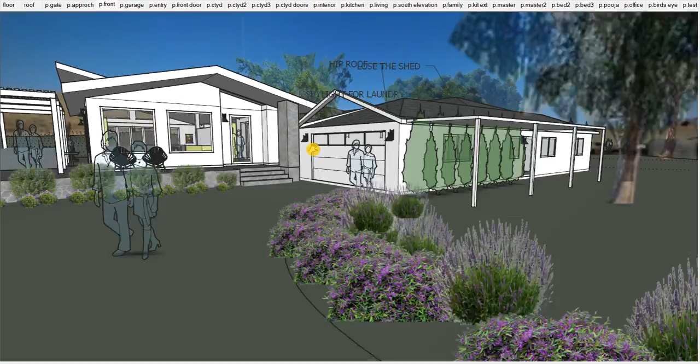When we met last, you said that you were pretty happy with the overall shape and look of the home, but we came up with a couple really good changes on the fly, such as taking the gable roof over the garage and making it a hip roof.

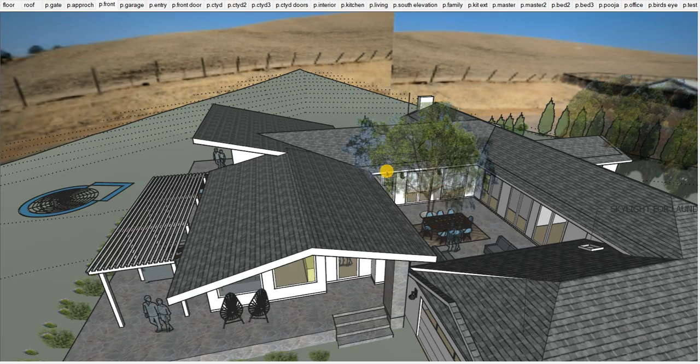But there were a couple comments you made that might have been on the fly, but they really stuck with me—about the boxiness of the master suite, which we'll get to in a bit, and also that the entry here in the corner wasn't quite suiting you. You wanted a little more height, and you wanted it to be a bit more centered on the elevation at the front. So I explored whether I could just continue the roof slope up this way to get some more added height in the foyer.

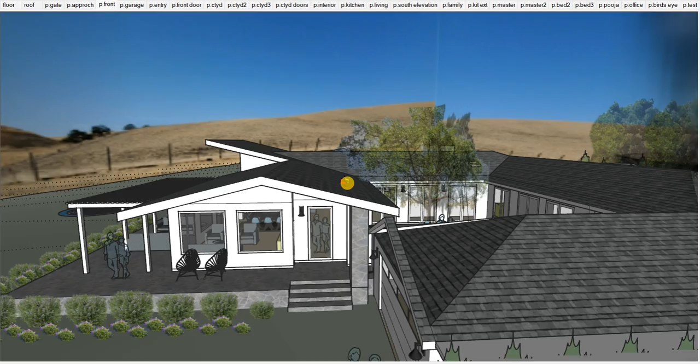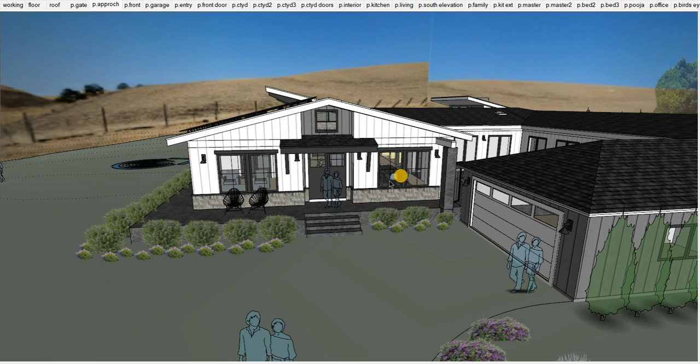I wasn't satisfied with anything I was coming up with, so I took a look at reconfiguring the floor plan at the front area to allow the elevation to be centered, naturally taller, but still have a really good layout where the foyer now comes in between and enters the home, centered between the living area and the dining room. So I've reconfigured the floor plan here, and I think I'm quite happy with the look.

So the entry is right here, centered in the elevation. We have a tall window at the top of the full-height entry. I've introduced a little low roof element here just to break the scale of this elevation down and make it a little more interesting.

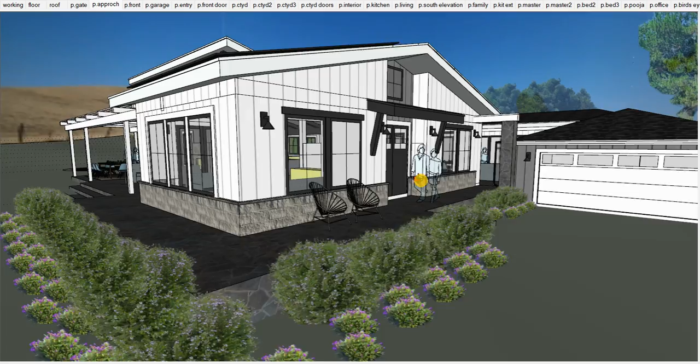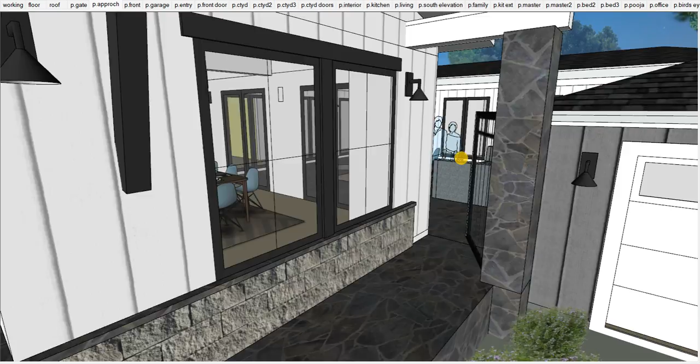I've downplayed this stone portal leading to the courtyard a bit now that the front elevation is centered here and the front entry was so domineering. I kind of want to downplay this—I still think it's nice to have this element with a 6'8" tall gate leading into the courtyard. I like that a lot, but downplayed from what we had.

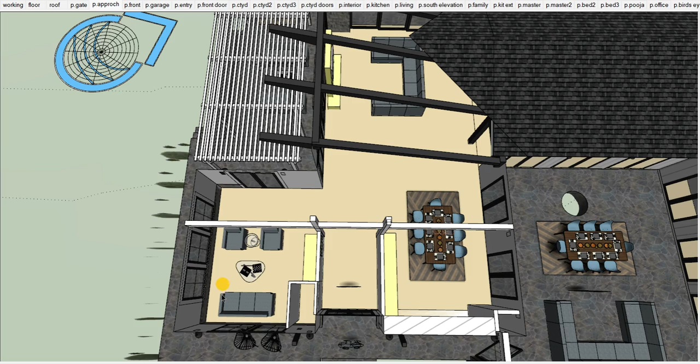If we take a real quick, very rough look at the floor plan, you'd come into the foyer. I propose a little coat closet right here off the entry, then past these two posts into sort of the circulation zone that leads you into the living room area, with a lot of windows engaging out into the backyard and side yard space, plus a sliding glass door leading into a very large, expansive covered pergola area.

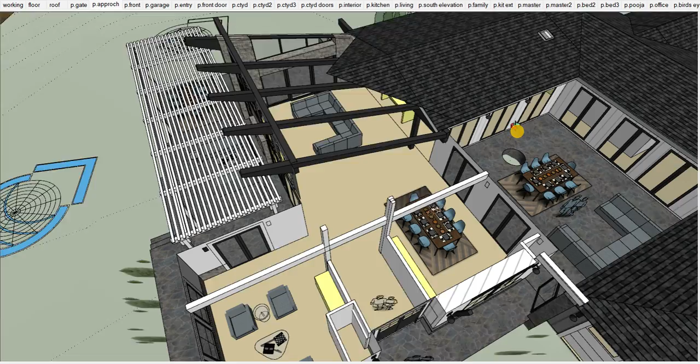The dining room, instead of occupying this space here, I shifted down towards the front part of the house and more of the courtyard area. But it still has a good connection to the kitchen, the family room, and now a bit of the living room as well, and the courtyard. This reconfiguration of the floor plan is what's allowing for an elevation that I think might get you just a little more excited about the front.

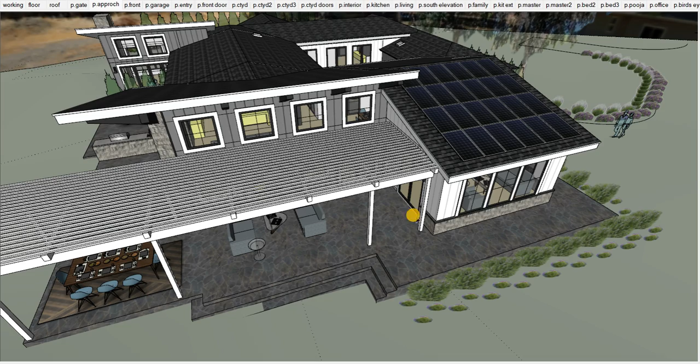Touring around the rest of the home, I know you guys were really into the pergola idea out here, but because of the shift in the floor plan configuration, I now think it'd be a good idea to bring this pergola element up against the tall southern-facing wall. This is going to provide a lot of great shade for these windows that would otherwise get really impacted by the southern sun.

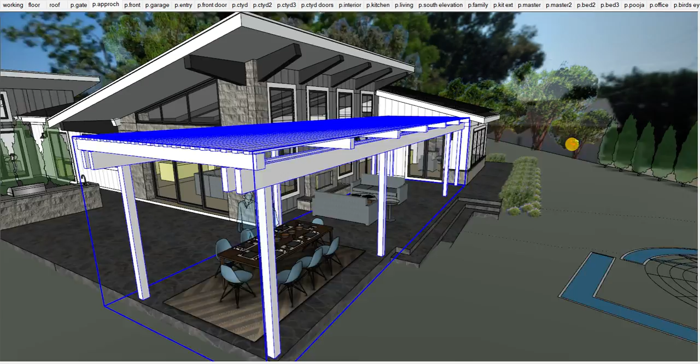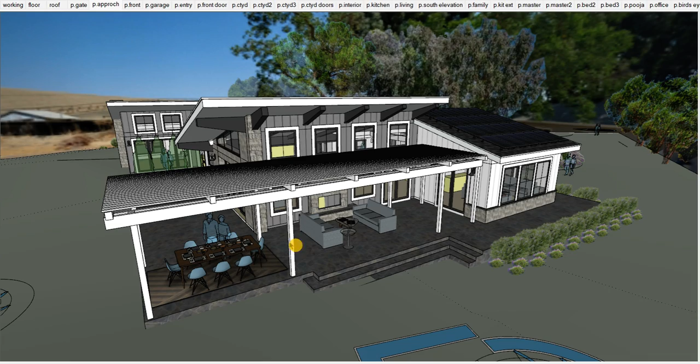This overhang up here, a really impressive roof overhang, is going to protect these clerestory windows just fine. But this pergola element down here provides a lot of really great shade and creates a little outdoor space for you. Without it, the home is still quite fantastic, but with that piece, it helps bring people out into this southern elevation party space.

Very excited about this. So a change we talked about here that I've now explored further was—hey, what could we do to make this back wall a lot classier?

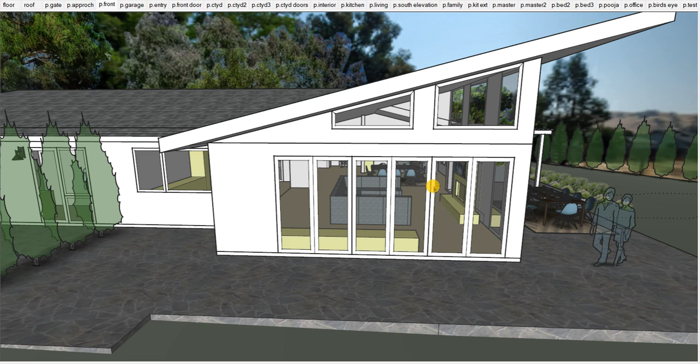What I had quickly mocked up for you when we met last time was something where we'd do one of those bifolding accordion doors, where each panel is about 32 inches wide, just under 3 feet, and they can all accordion fold and live in a stack on the side. That's one way of doing it.

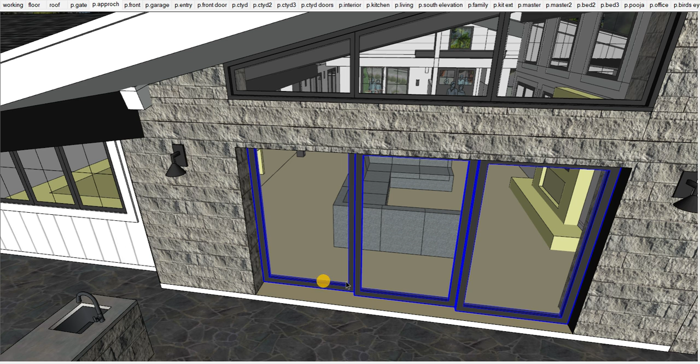But I really like seeing fewer panels, fewer frames, more glass to frame ratio, with a sliding pocket door. So what I'd propose is that all three panels, each 5 feet wide for a 15 foot wide opening, would slide away into a pocket that's also 5 feet wide, so they really just disappear from view and give you this great outdoor connection, unhindered and uninterrupted.

Perhaps we want to go with an L-shaped furniture arrangement rather than anything with a back right up against all this glass, but that's interior design for another day.

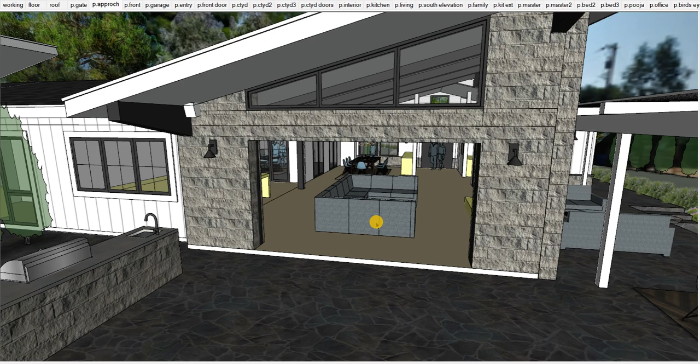But I really, really like this. With a special treatment here where we have this expensive door down below, I'd say let's go for these expensive rake top windows, these angle top windows that just go right up to the ceiling plane.

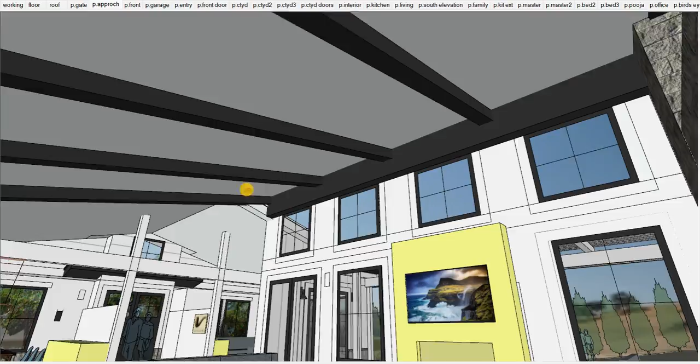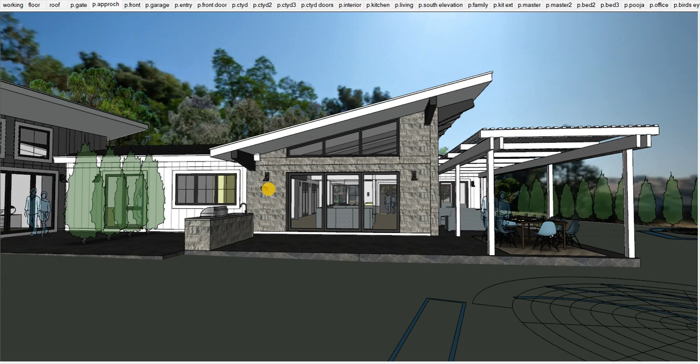And then inside, to provide a little interest and rhythm to the ceiling plane - this is so rough right now, I'm hesitant to really show this to you - but I propose we'd see a continuation of these exposed roof beams on the inside to provide visual interest and hopefully get a bit of a twofer, a little more bang for the buck out of the structural frame. This is something I'd want to explore more if you're intrigued, study it and iterate on it. Right now this is just a first pass.

I've incorporated a little outdoor kitchen here, off of the main indoor kitchen. My one concern is, first of all, I don't know if you do a lot of outdoor cooking, if this is something you'd even really want.

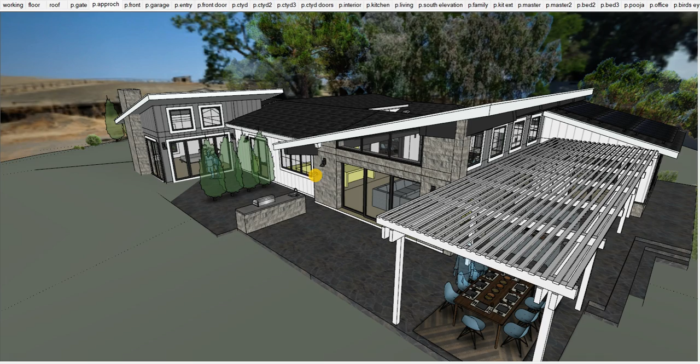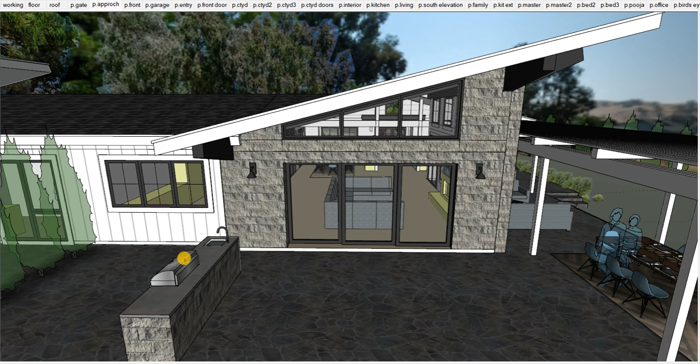But if it was, is it sufficient for you to have it here when the way to get out to the kitchen easily is going to be through these swinging or sliding glass doors, rather than this larger showpiece door? These sliding glass panels can open, and it's not too hard to do, but if you've got a platter full of chicken or vegetables you just grilled up, you're going to want easy access. So if we're doing an outdoor kitchen, I wonder if we need this as a door rather than ganging the windows up like I like doing.

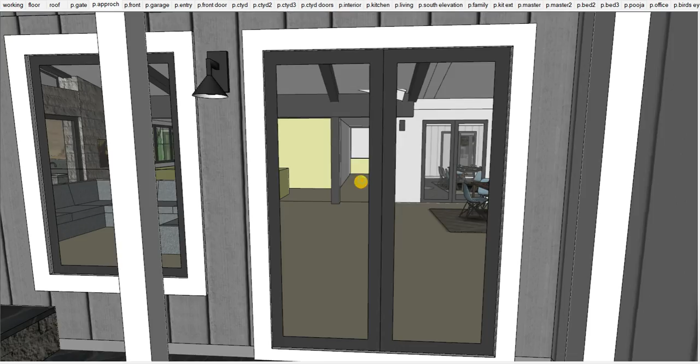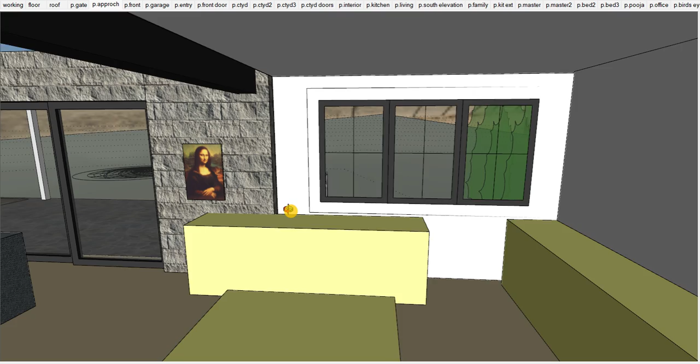Having this be a circulation zone right in line with the hallway leading to the bedrooms - I really like this being the circulation zone, but maybe we want to consider breaking the countertop right here in the kitchen. Say come over with 3'6" or so, break through here, and just have a small bit of countertop, maybe coming a little further into the living space. And then these three windows, maybe this becomes a swinging door that connects right out to that outdoor kitchen. That could be really nice, but I want your thoughts on that.

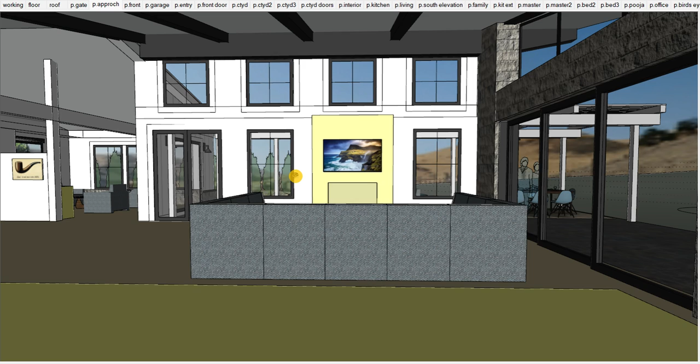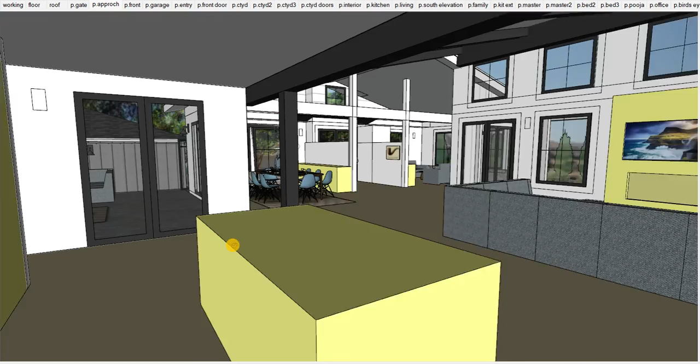Also, I know you've wanted the sink up against this window looking out here. I'm tempted to say maybe the sink wants to be on the island - look at this view, it's really special. For me personally, doing dishes at the end of the day, I think I'd rather look out with this huge vaulted ceiling opening up before me. This long view is fantastic. This other view is great too, but it feels a little turned to the side - of course you're still in the room. I think I'm splitting hairs here, but if it were completely up to me, I'd put the sink here on the island.

Okay, the courtyard hasn't changed much.

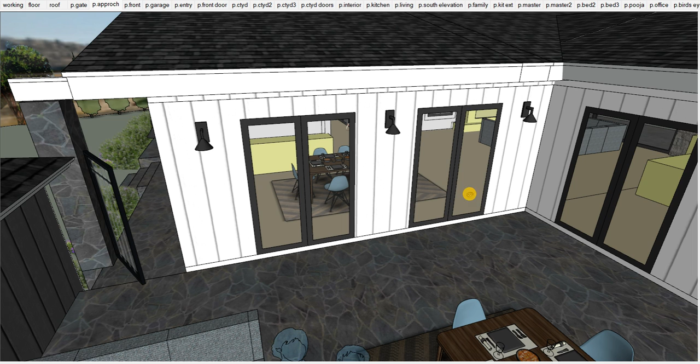I still really like the way the courtyard was, so this redesign keeps a lot of what we had going, integral to this design as well. The one really great thing is that now with the dining space right here, this wall makes a lot more sense to have sliding glass on it. Before, with this being the foyer, I felt like it was kind of forced. Now with the dining area connected right here, I'm really excited about it.

I don't know why the tree in the courtyard isn't showing up right now, but that's still part of this design. The rest of the spaces are pretty much the same as what we saw last time, with the exception of a change I'm proposing at the master suite.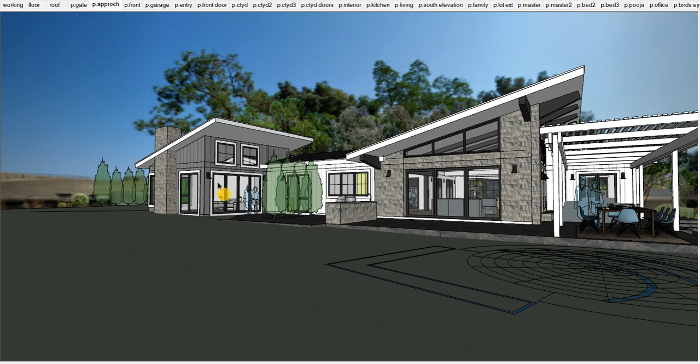So something's a little messed up here. What I'm proposing now is, instead of just a simple continuation of the roof we had over the guest bedrooms, we would instead do something that sheds up, much like the great room's doing. So when we stand back here in the backyard, both the great room and the master suite will slope up simple shed style with large clerestory windows above their lower doors. So lower doors here in the master bedroom, low windows and doors here in the great room, higher windows up above. I like this as a motif, I think it's really quite striking.

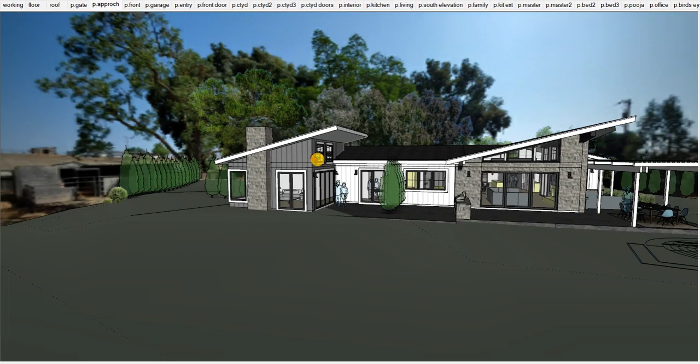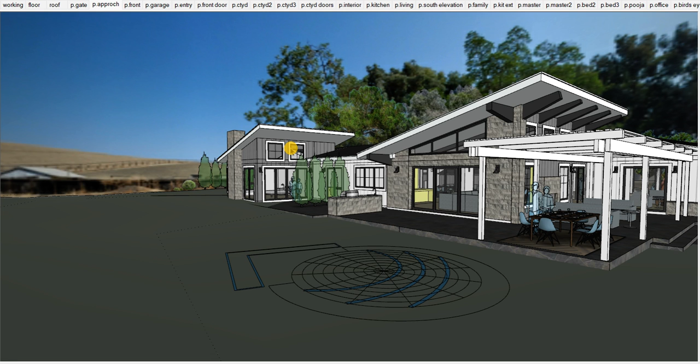But let's see. Yeah, I like this a lot. I think though, because the master suite is a smaller space, the scale and heights might need a little bit of adjustment. I don't propose to do the same kind of beam treatment at the master suite. I'd like the master suite to be a slightly secondary volume to the great room. So though it's got the same roof slope and some of the same kind of window design, we wouldn't do exactly the same detailing for both spaces, just so it feels secondary to the great room.

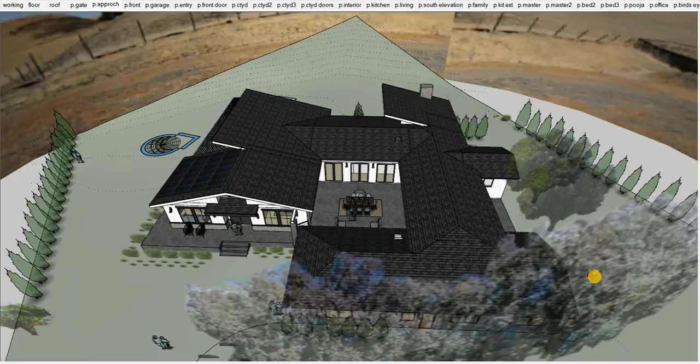Just a quick fly around for the rest of the house. Of course, we can go over this all together live, but I'm really curious to hear your thoughts on the revisions here. Again, just a quick review for where we were before - a lot simpler, a lot less definition of the materials.

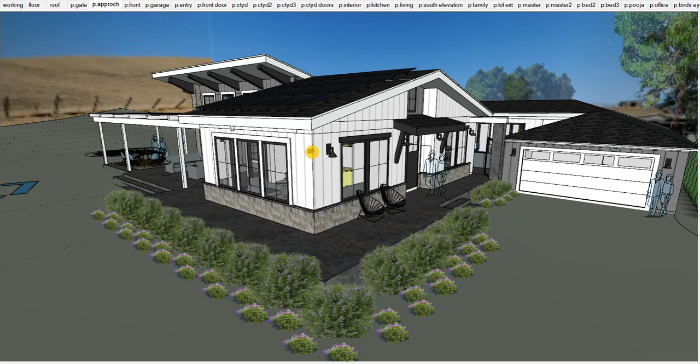So one thing to note is that I am showing now the proposed material palette. Although the model is still a little bit rough, what I would propose is that we'll do almost entirely the entire house out of painted fiber cement siding. So this would be vertical siding made out of fiber cement, which would be a fire-resistant, insect and rot-resistant material that needs very little maintenance. I think it's really perfect for your high fire hazard area.

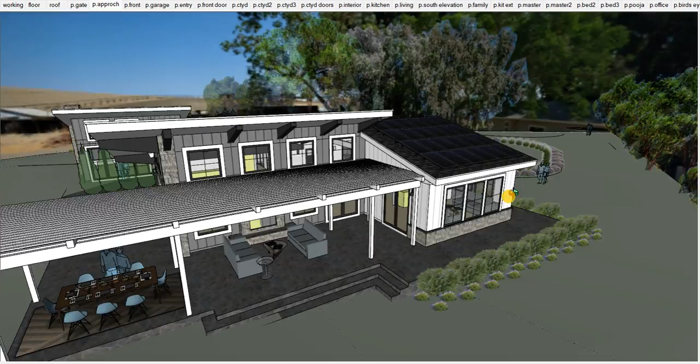It would either simply be painted one of two exterior colors, either white, which is very appropriate for the farmhouse look, or then there are certain tall volumes that would be painted gray, just for some contrast. Now, of course, the white and gray can change a bit, but I think for a farmhouse look, a very neutral color palette is appropriate - so white, gray, and tans would be appropriate as well.

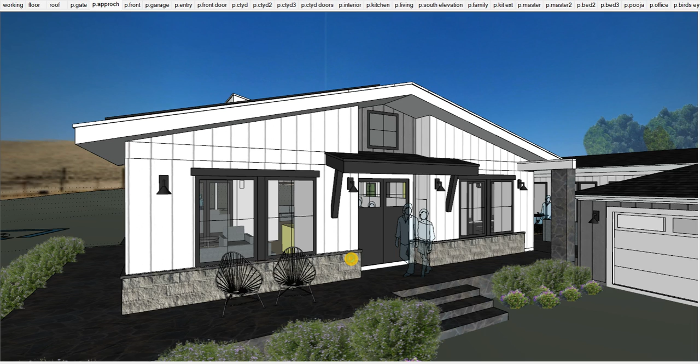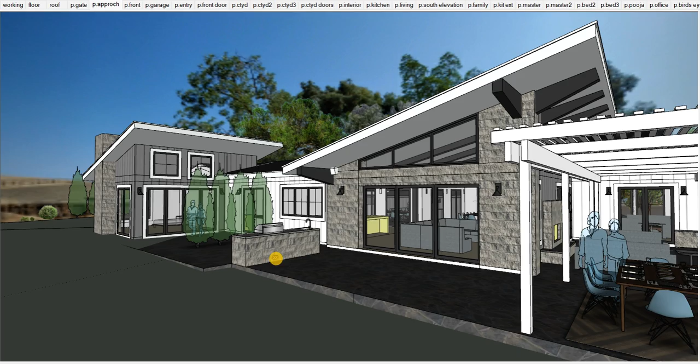So I'm showing a little bit of a tan stone base at the front elevation, tucked under the windows of the dining room and the living room. And then that same tan stone accent would be used for the fireplace, as well as the thick wall that would host the pocket for the pocket doors, and then any other accessory elements that we can add stone to logically, like the outdoor kitchen and your master bedroom fireplace would have that same stone veneer.

And then a simple comp shingle roofing, simple painted white wood trim, black windows that are very large and tall in proportion with a little bit of a simulated divided light, all will give you a really nice farmhouse appeal. And I really like this front elevation. I think this has a lot of farmhouse charm with these simple angled roof brackets that support a simple angled roof shed. I think that's really, really nice.